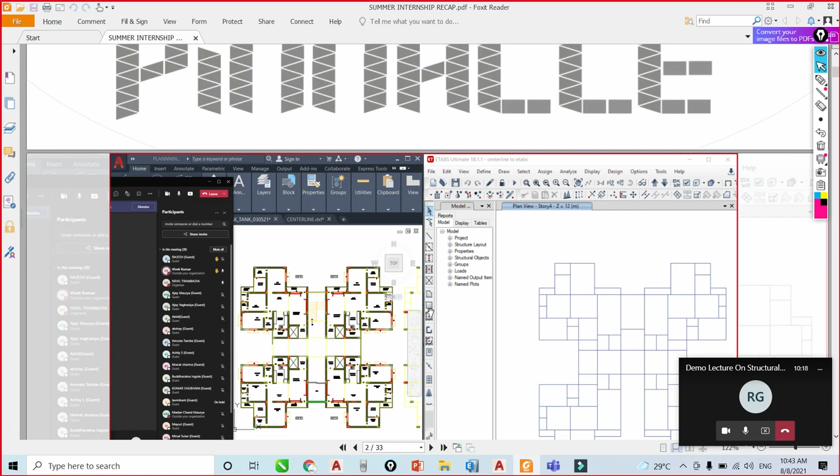So myself Nikunj Sondagar, and here you can see our summer internship program highlights. Here we did a step by step procedure to complete our 4 to 5 projects. On the first day we will discuss some basic overview of ETABS as well as AutoCAD drawing. Then on the second day we will try to understand the different grid systems using ETABS.

There are so many grid systems, and we have so many options to import the grid. We have architectural plan view, floor plan, radial distance, node to node distance. So we have many methods to import our drawing into ETABS software.

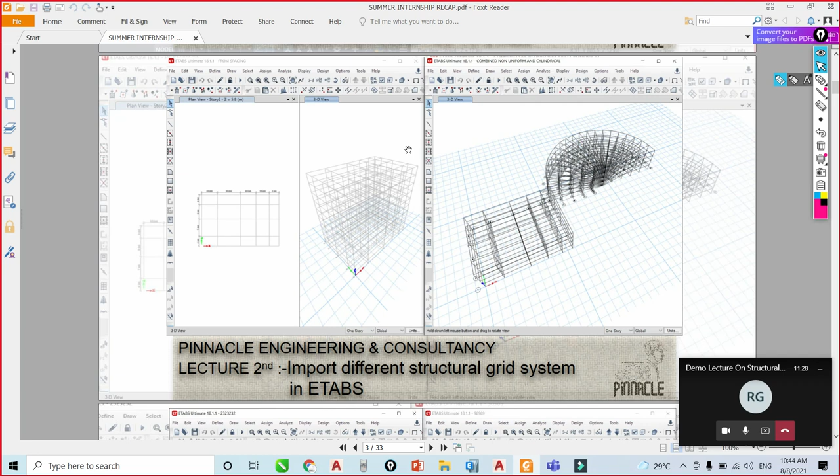We will discuss all these things. Then on the third and fourth day we will try to prepare a complete truss model as well as beam model, where we are going to compare the result output, manual result with software result.

So this is our input, and this is our output. We'll cross check this output with our manual calculation, and also discuss the shear force diagram and bending moment diagram.

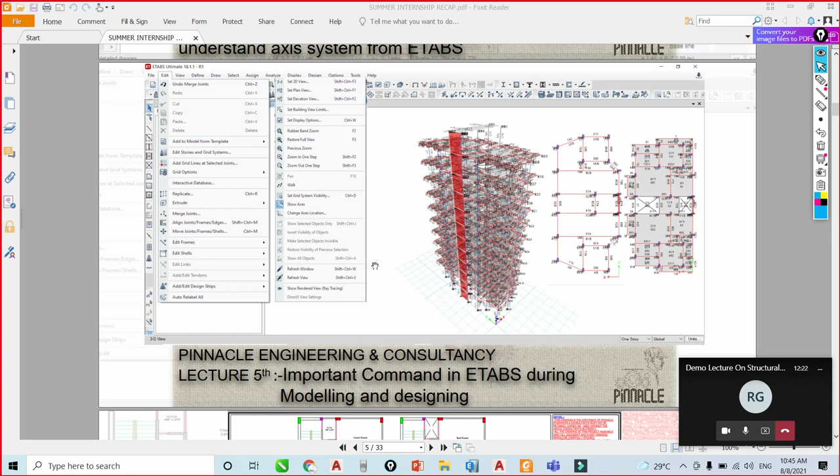Then next day we will discuss important commands used in ETABS during modeling, analysis, as well as designing.

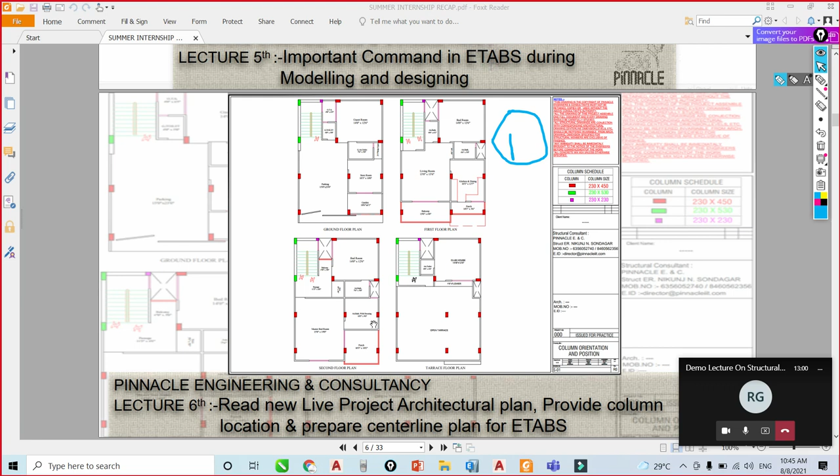Then our main task, our first live project, where we are going to deal with an actual real life project. Here you can see the architectural plan, and on the first day we need to provide column locations. So you can see here, we are going to provide a few columns, as per architectural requirement as well as structural requirement.

Then next day we will import the same project into ETABS. Here we are dealing with beams, and we are going to draw a beam layout also, so where the actual beam location is, and we are going to send this actual beam position to the architect to confirm the positioning of the beam.

Meanwhile we are going to import and prepare this model. After preparation of the model, we need to assign different loads.

First, here you can see the dead load, superimposed dead load due to the wall. So whatever wall you are going to provide here, we need to assign this load. Here you can see the UDL load acting on all the beams. How to calculate this weight per meter and all these things, we will discuss in the subsequent lecture.

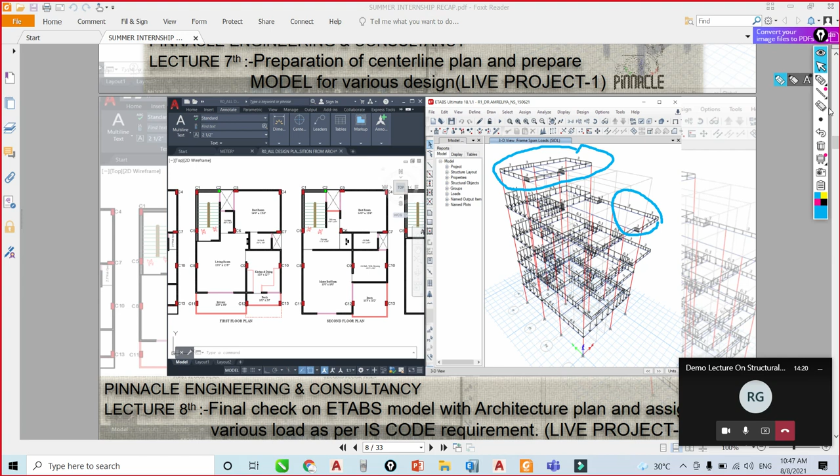Now, a very important detailed discussion about IS 875 part 1 and IS 875 part 2. Can anyone tell me what IS 875 part 1 is useful for, and what 875 part 2 is useful for? IS 875 part 1 is used for calculating dead loads, and part 2 is used for calculating live loads. Great, right.

So now we need to calculate this weight of the floor. If we are going to provide any RCC floor, this is the particular RCC floor, and exactly above the floor we need to place some tiles. So we need to assign this load also. We need to calculate all this dead load using our IS 875 part 1.

Now we will discuss the live load. Live load means human load and all other load which is movable. We are going to assign the minimum live load as per IS 875 part 2. We have so many different loads, and what is the minimum load combination? We will discuss minimum load in this subsequent lecture.

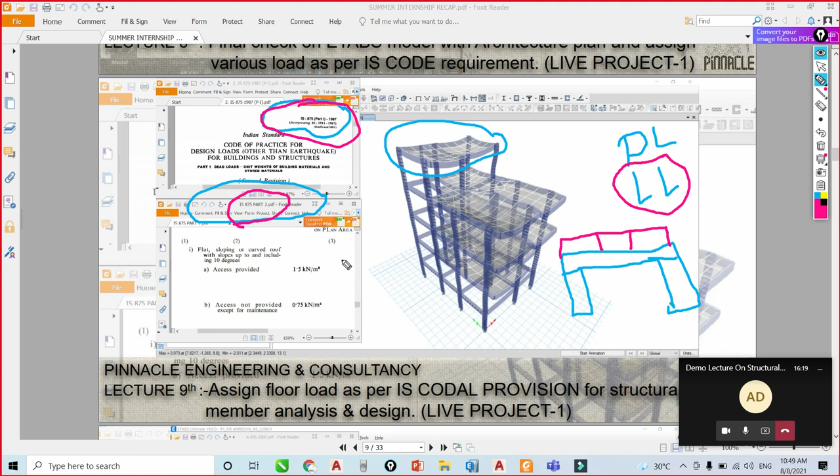Here you can see on my screen the load acting at a roof level. Like here we assign 1.5 kN per meter square live load at a roof level. But what is the actual roof? Is it an accessible roof?

Here you can see another case where access is not provided. At that point we are going to assign 0.75 kN per meter square. That means if you are going to provide any inclined roof or inclined floor, we need to assign only 0.75 kN per meter square load, because you are not able to stand or sit there. So this load acts on the roof due to live load, and this is very important.

And we have different loads for the sunk area, for the toilet, for the kitchen, for the balcony. We need to assign different loads as per structural requirement, as well as for the staircase. I would like to discuss that, just give me 5 to 10 minutes.

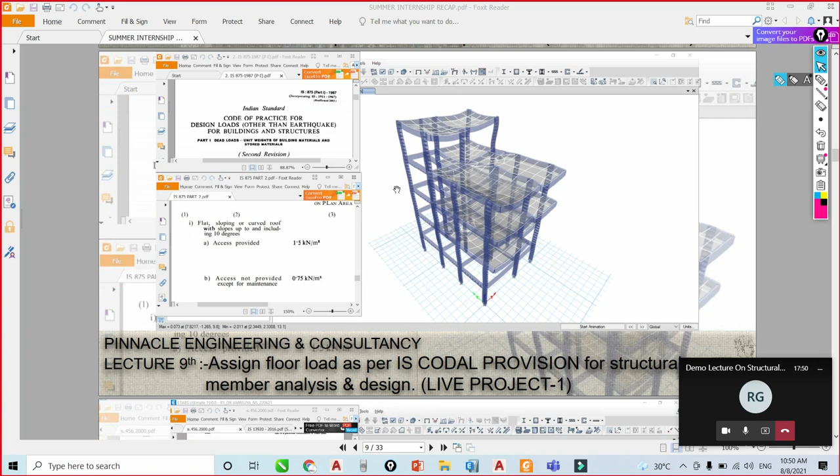Then next, assigning the dead load combination. This load combination is as per IS 456, useful for the design of foundation.

Excuse me sir, the presentation is not visible on my screen right now. Kindly leave the meeting and join once again. Okay, okay sir.

So this load combination is due to IS 456, which is useful for the design of footing. And in IS 1893 part 1 2016, the load combination is useful for the design of column, design of beam.

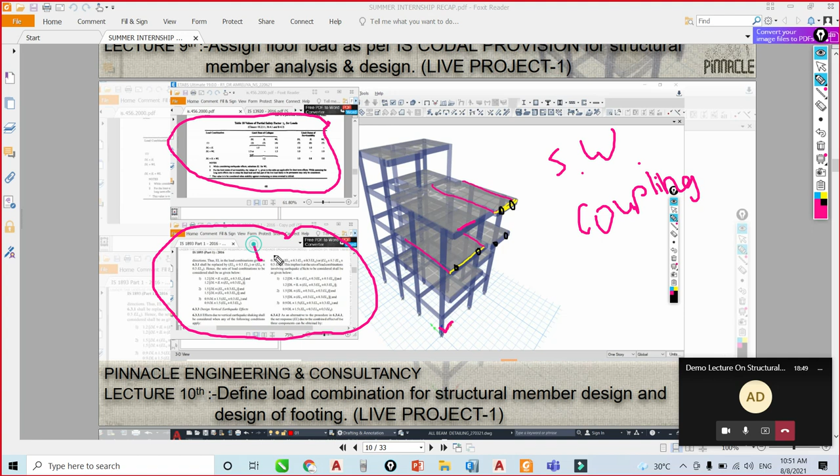Design of shear wall, design of coupling beam. So all the things will be designed using IS 1893 part 1 2016.

Then this is completed detailing, already done by our students. So here we are representing that. In subsequent lecture we will discuss these steps, how to deal with this detailing in our actual project. So here you can see the footing detailing.

And this is particular column layout position, reinforcement related to columns. Here you can see this plinth beam design. Then this is ground floor design.

Here we assign the torsional reinforcement. What are the importance of the torsional reinforcement, we will discuss in subsequent lecture. This is second floor layout, this is third floor layout, and this is terrace cabin layout.

So we are dealing with foundation to top of slab level, that means terrace cabin level. We are not going to ignore all the things, as per architectural requirement, as per structural requirement.

The presentation is not showing, so please leave the meeting and join again. I also tried it, but I'm not able to view your screen. Even I also tried, I can't see your screen. I'm facing voice lag. It's not visible because I'm also connected from my phone. No problem, I'm sharing the screen again.

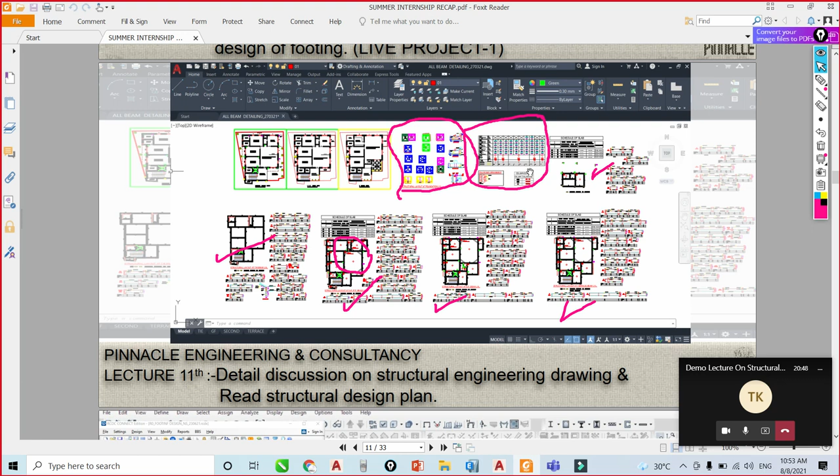Okay, so now you are visible, but the presentation is still not coming up on my screen. Now I'm able to see the presentation. Can you just take 2 slides back, because after load combinations it was completely blank out, we were not able to see. Turn off your video, sir, maybe it is possible due to that. And guys, those who are facing issues, you can turn the speaker from your device, change it to speaker so your voice will be clear. So now, is anyone facing the problem? No sir, it's perfect right now. Okay, start it.

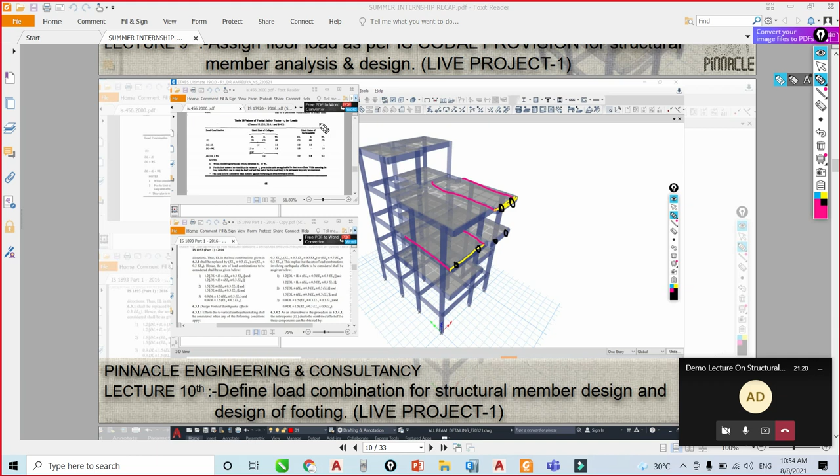So here we are discussing once again about the load combination. Here we are going to use IS 456 2000 for the definition of our load combination for the footing design.

Footing design done by using IS 456 different load combination, and our column, beam, shear wall, coupling beam, and all the things we are designing as per our IS 1893 part 1 2016. In subsequent lecture we will discuss this load combination in more detail.

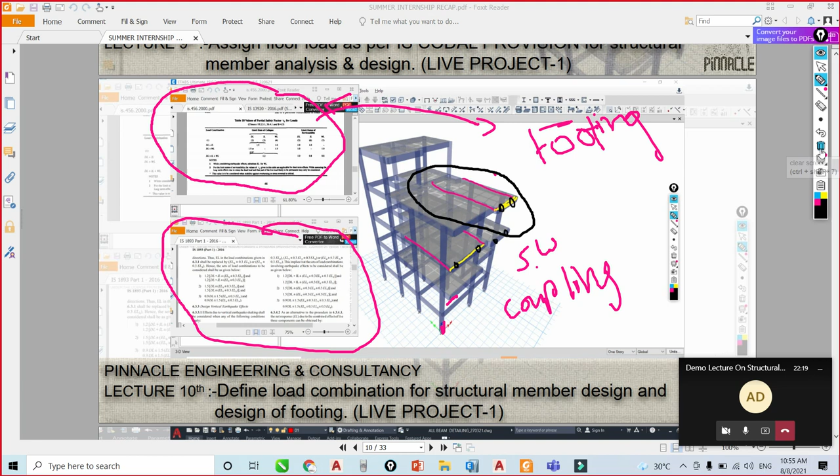So here you can see one more important term: this is release. At a secondary beam we need to release the moment for that particular beam. That means I will discuss these things, this is very important. This is our fixed beam, and this is our simply supported beam.

You already know that the fixed beam has a bending moment that looks like this, and simply supported beam bending moment looks like this.

To release the moment at a support, we are going to provide some releases. So at that time this feature is coming. We will discuss in depth, because this is a very large topic and we need to understand the actual drawing, so we will discuss in subsequent lecture.

So this is our particular structure design. Here you can see this is architectural plan, and then this is our footing design, footing layout, then column reinforcement detailing, and here you can see the plinth beam design, and this is our first floor slab layout, second floor slab layout, third floor slab layout and beam design, and this is our terrace floor layout.

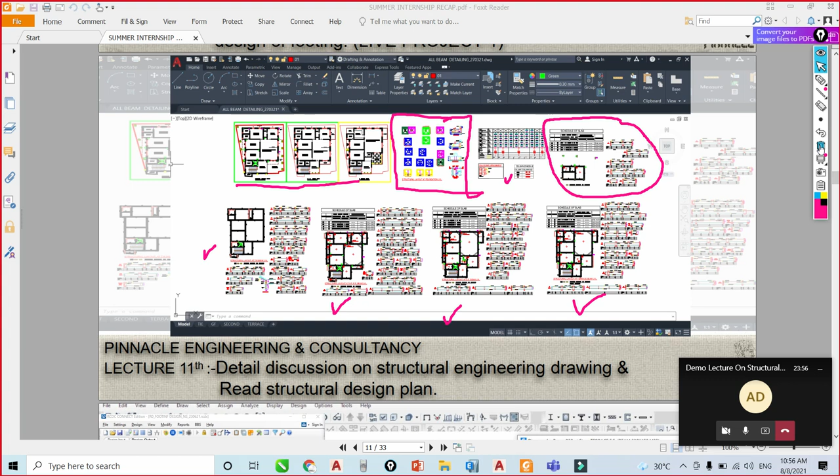So we are going to discuss all the things, that means we are considering from foundation to the top of structure. How to prepare this drawing and all the things we will discuss in subsequent lecture.

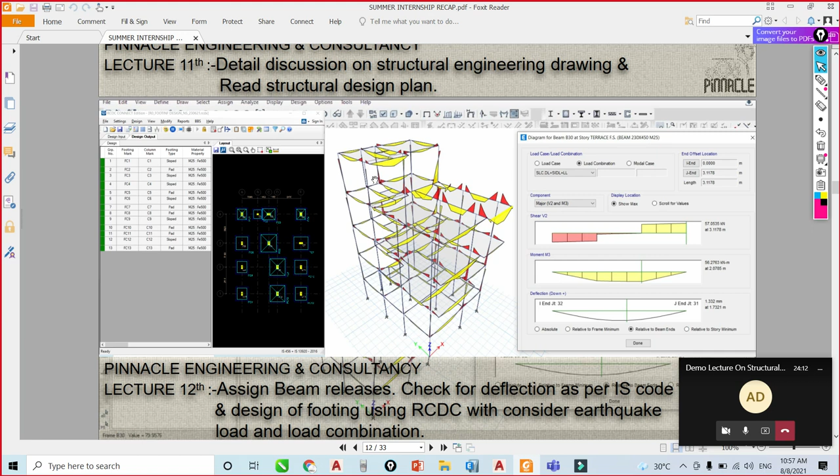Then in next day we will discuss about design output, and here we are going to use RCDC software to design our footing. And here you can see the beam reinforcement, beam bending moment check, shear force as well as bending moment.

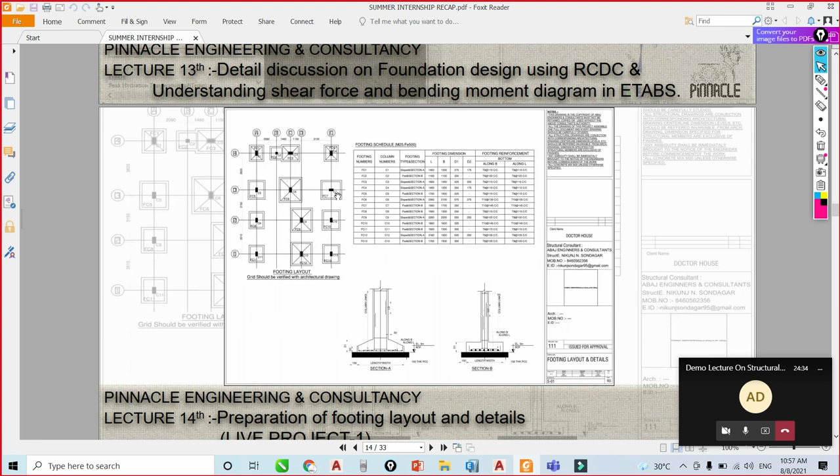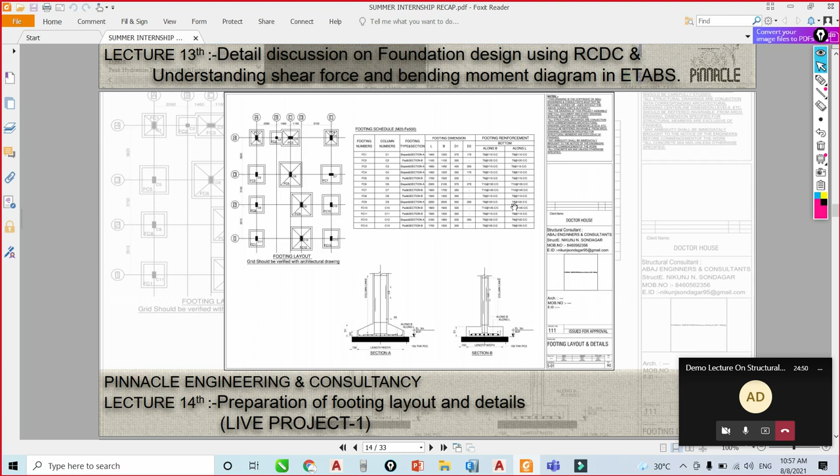One more detailed discussion about this, and in the final stage we are going to prepare our footing layout. As per architectural requirement, structural requirement, and site requirement, we prepare this sheet for site execution, and this drawing is already sent to the site for further work.

Here you can see some highlights related to the same project: the plinth beam layout, then the design of column using ETABS and RCDC, and preparation of the column layout.

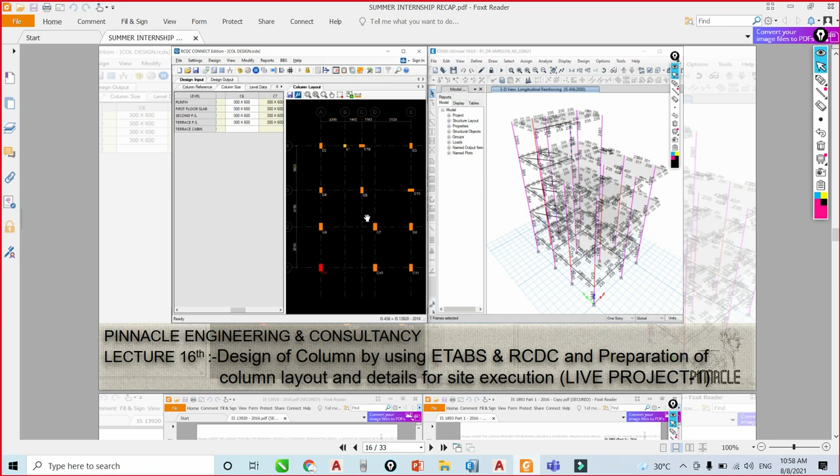Design of column using ETABS as well as RCDC.

Then a detailed discussion about IS 13920-2016 as well as IS 1893 Part 1 2016. In more depth we discuss SP34 and IS 16700. IS 16700 is particularly useful for higher structures, so we will discuss IS 16700 and SP34. SP34 is basically useful for detailing purposes.

Now this is our project number 2. Same introduction.

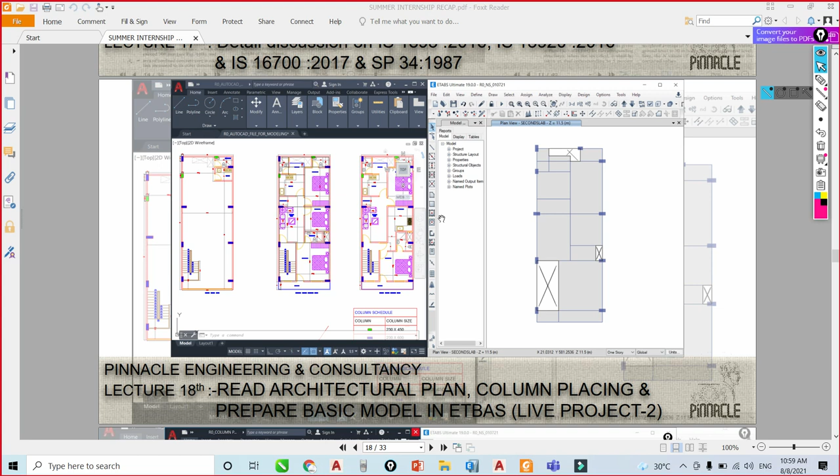Can you please share this presentation in the WhatsApp group? Definitely, we will share the presentation with you. Due to network issues, the presentation screen is coming blurry from our side, so we can't read some parts of it. No problem, definitely we will share the presentation with you. Okay, thank you so much.

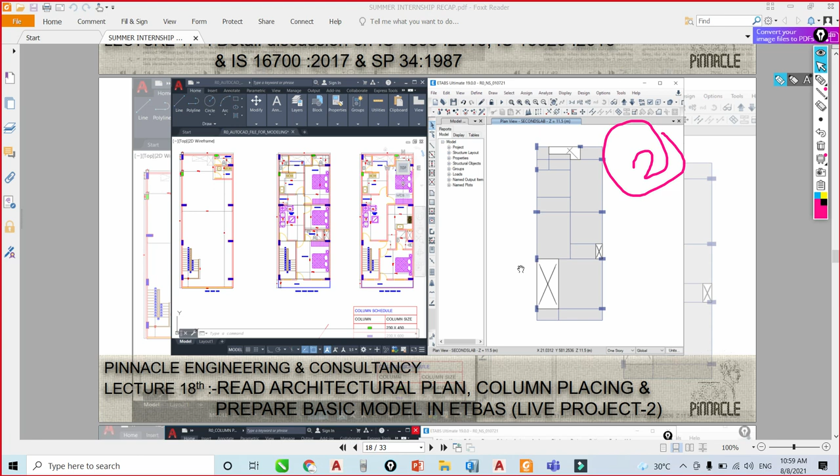So this is project number 2. Here we are going to deal with column positioning first, then preparation of the model, and the final model with all load combinations.

Here we are going to assign the stair beam, as you can see. We are going to detail it like this and we are not going to ignore this beam, because as per structural requirement we need to provide each and everything. So in depth we will discuss staircase design and the different methods to assign the staircase load.

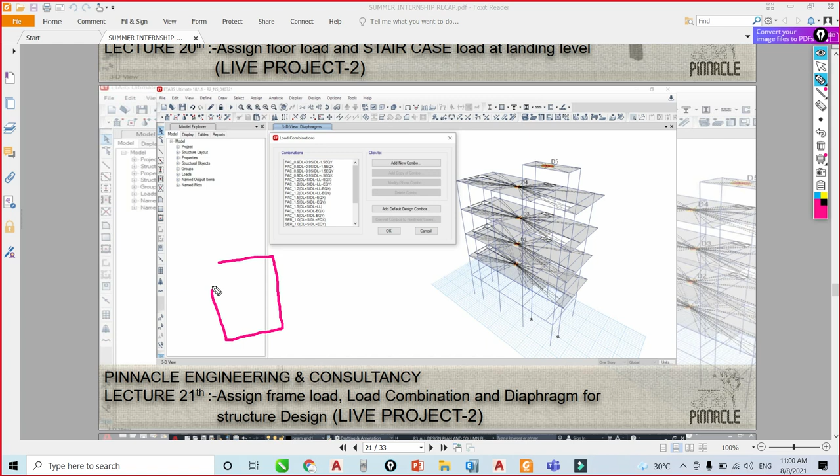Next, here we are going to assign the diaphragm. Diaphragm means, let me give you a simple example: this is the plan view of our bed, and this is the plan view of our dining table.

Now I am going to assign some inclined load, same for the bed and same for the dining table. So can anyone tell me, due to the bed and due to the dining table, which gets more effect - the bed or the dining table?

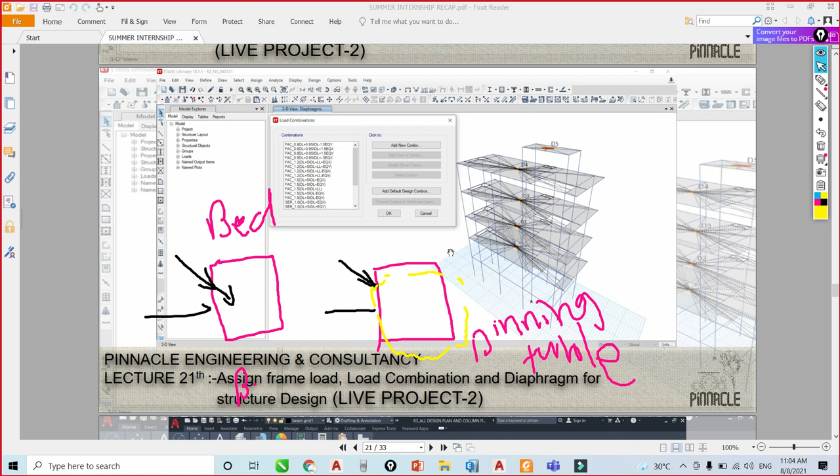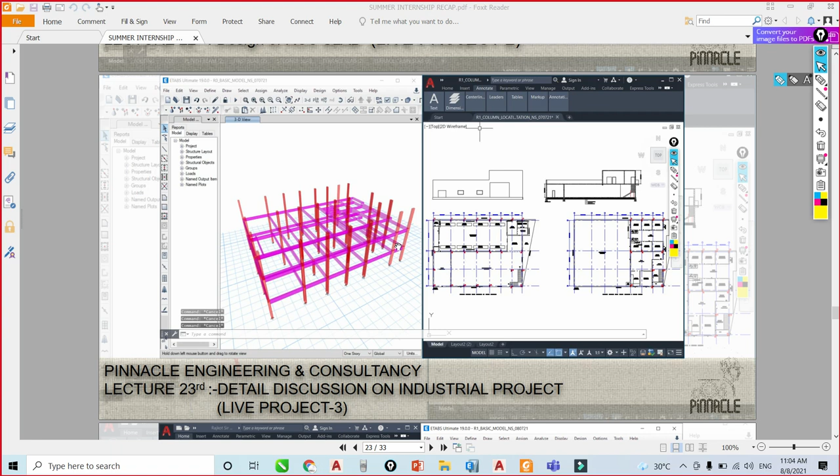Yes sir. Okay, then let us design the same RCC slab for plinth beam, first floor, second floor, third floor, terrace. Then project number 3, detailed discussion on industrial project. Same model preparation. Then project number 4, a particular commercial soft building. Here you can see we are going to deal with soft storey detailing, right?

Okay, then here we are going to design our eccentric footing. Here we have some eccentric footing, so we are going to deal with this thing also.

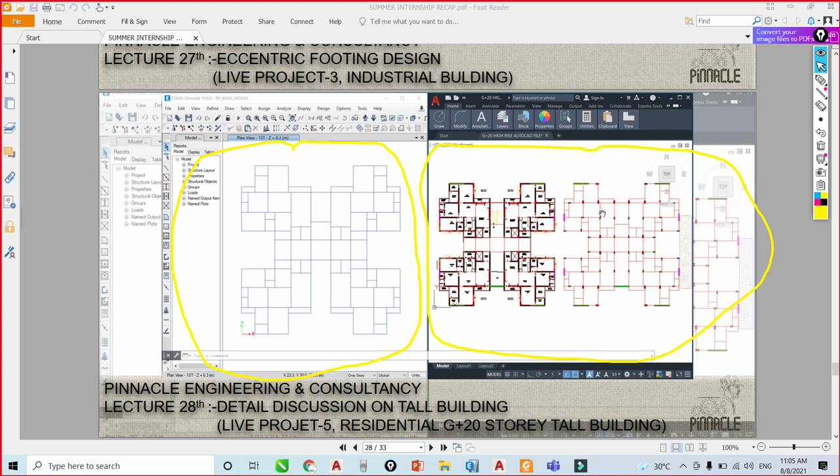Then this is our particular high-rise G plus 20 storey structure. On my left hand you can see our ETABS model, and on my right hand you can see our AutoCAD file. So here you can see the particular model.

मैं आपको genuinely एक बात बता रहा हूँ, इसका जो प्लिंथ बीम था और फर्स्ट फ्लोर का स्लैब था, उसका मैंने सिर्फ मॉडलिंग किया है। बाकी सारी चीज़ें जो मॉडल प्रिपरेशन से related हैं, वो हमारे student करेंगे। इसका जो भी मॉडल प्रिपरेशन था, वो सब हमारे students ने किया है।

मोस्टली हम 2 प्रोजेक्ट करवाते हैं, यानी आपको हम task assign करते हैं। जो students ने ये सब task किए हैं, model preparation will be done by student.

Finalize ETABS model as per our IS 16700, live project 5, G plus 20 storey tall building. Here we are going to assign different loads, and all the loads assigned by our student.

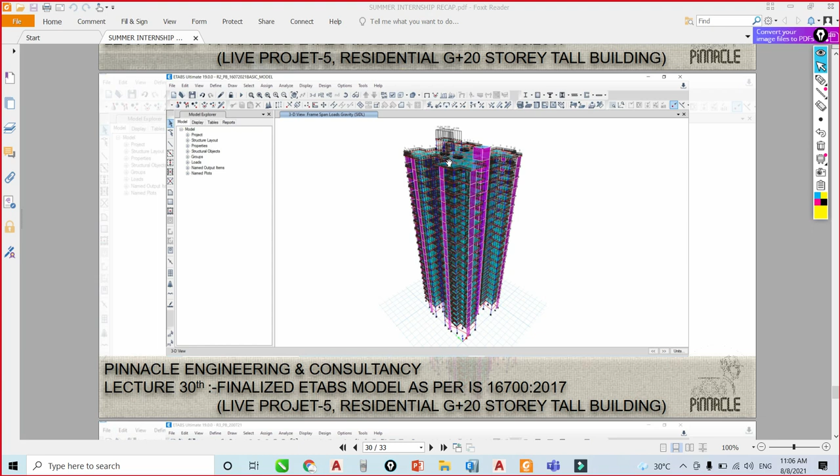Now our main task, which is done by myself, related to definition. So here you can see the definition related to earthquake force, wind load, and response spectrum.

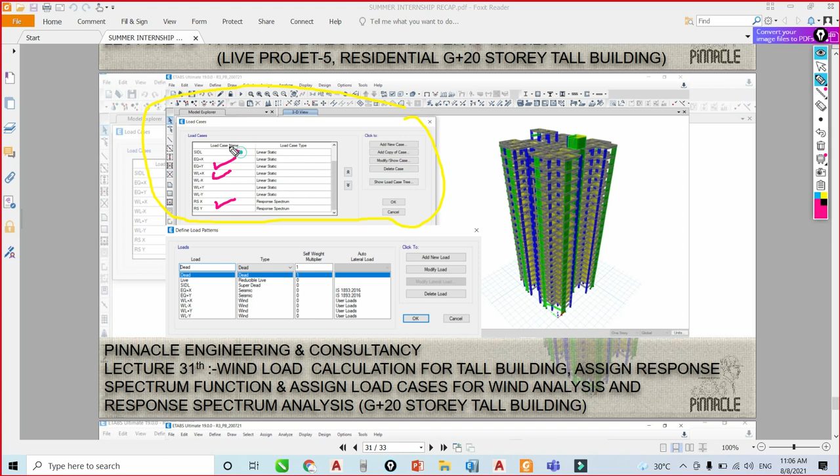So here we deal with the response spectrum, wind load also. You can see the different load cases, and this is our particular load pattern: dead load, live load, earthquake force, wind load.

Okay, so we are going to... Excuse me sir. Hello. Sir, what is the difference between the earthquake load and response spectrum?

Response spectrum is just another method to analyze the earthquake load on a structure, right? I think. In response spectrum... so why do we have to put, I will tell you both. Earthquake load on - okay. Response spectrum, it is depending on time.

Response spectrum is depending on time, and for our normal earthquake, which is not depending on time, as per time we are going to check the behavior of structure by using the response spectrum method. With respect to time, we are going to check the behavior of structure. You can see here - see the behavior of structure.

In different modes, we need to check the torsion of this building. This is not visible in a normal earthquake force. This is a multi-degree freedom system, right? And if you are going to design with normal structure, that means normal earthquake force, this is equivalent static analysis and single degree of freedom system. Here we are going to consider multiple degree freedom system.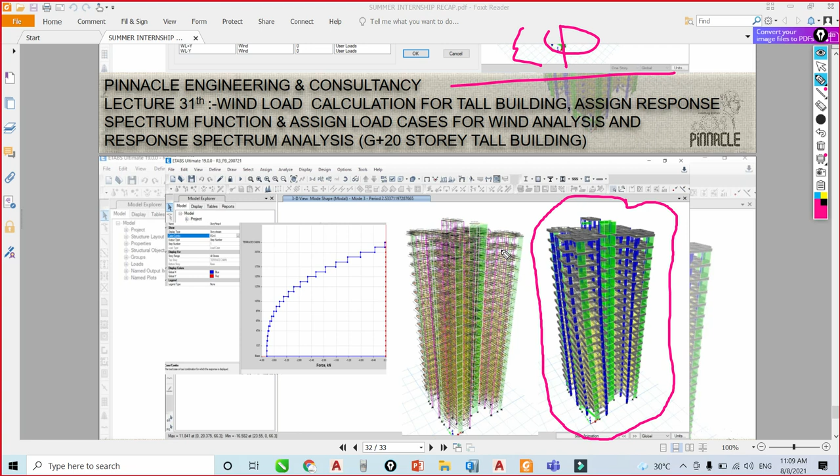I am going to show you all the models, right, just for 5 minutes. Sir, someone is asking in the chat, please reply them. Okay, just 5 to 10 minutes wait karo, answer karte hain theek hai, step by step. And who says this, are you faculty from Pinnacle? So guys, don't say that. कुछ भी बोल रहे लोग, वो कोई faculty नहीं है। अभी answer कर देंगे, आपका doubt थोड़ी देर में हो जाएगा। सब लोग एक काम करेंगे, last में 10 minute doubt का रखेंगे। जो भी sir doubt है, पहले complete कर दो। आपका जो भी doubt है मैसेज में टाइप कर दो, सारे doubt ले लेंगे last में 10 minute। Please type your doubt in the chat box, like we will take all the doubts in the last 10 minutes.

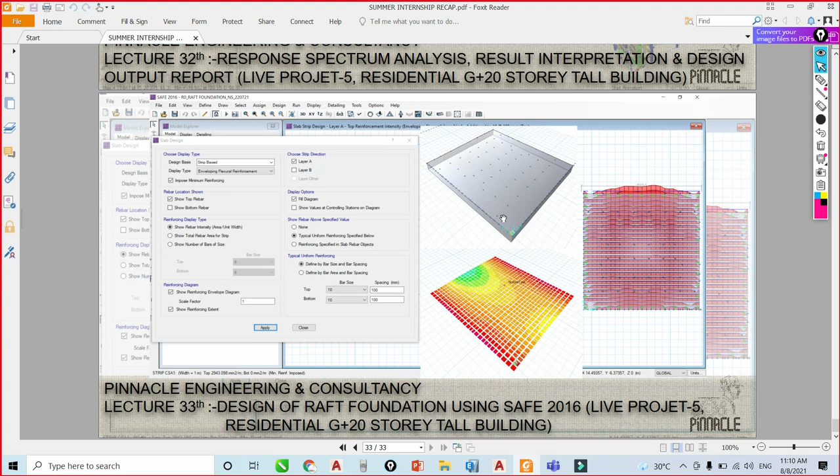Yes Nikunj sir, continue. So in the next step we are going to design the raft foundation. Here you can see the design of raft foundation, here we are going to deal with live project 5. यहाँ पे उसका हमने raft foundation की designing की है। So in depth we will discuss about raft foundation also.

So this is all about our presentation, and right now I am going to show you the same project.

Okay, so this is our project number 1. And this is our architectural plan of this same project.

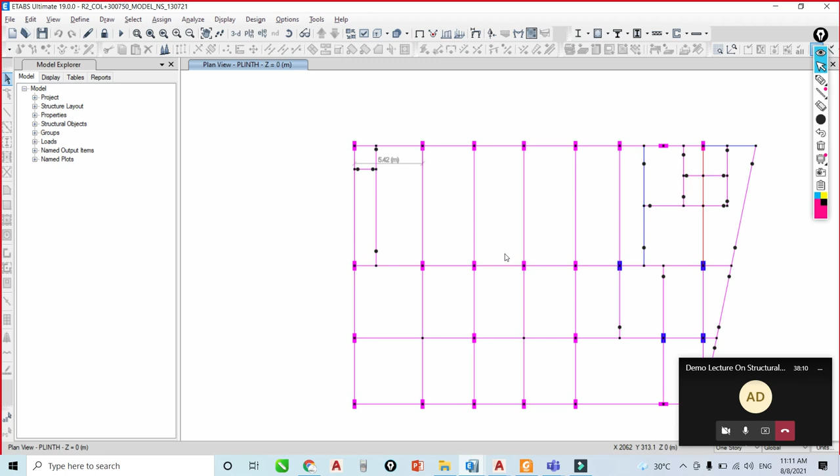So you need the plinth level. Now you can see here the particular plinth beam, so we are going to assign the different columns, and then later we are going to draw our plinth beam.

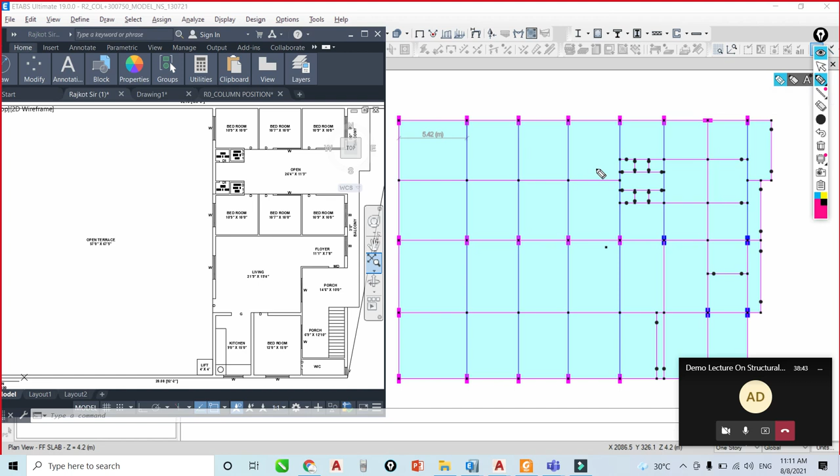And then this is our first slab level. That means in the half portion we have an open terrace. It means here we have terrace, and half the area will be useful for our residential purpose, as per our architectural plan. Then at the terrace cabin level, right, this is our last level.

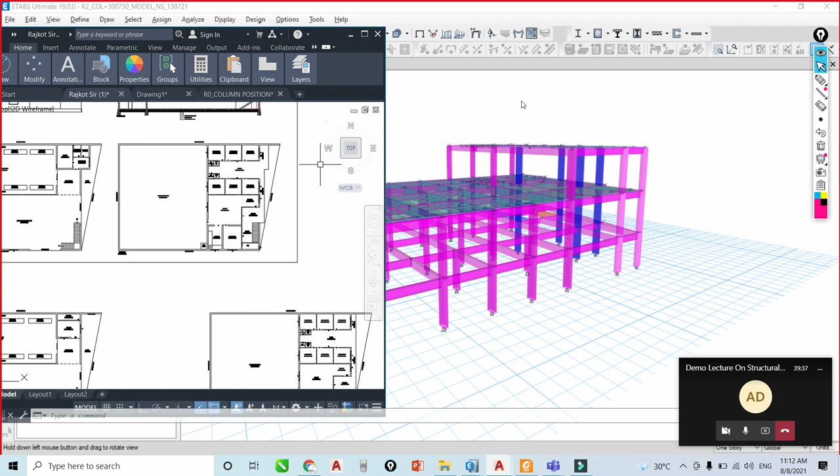Now you can see the 3D view, more realistic view, the particular 3D view. So by using ETABS software, we are going to prepare and transfer our AutoCAD plan into our ETABS model and design all the subsequent structures.

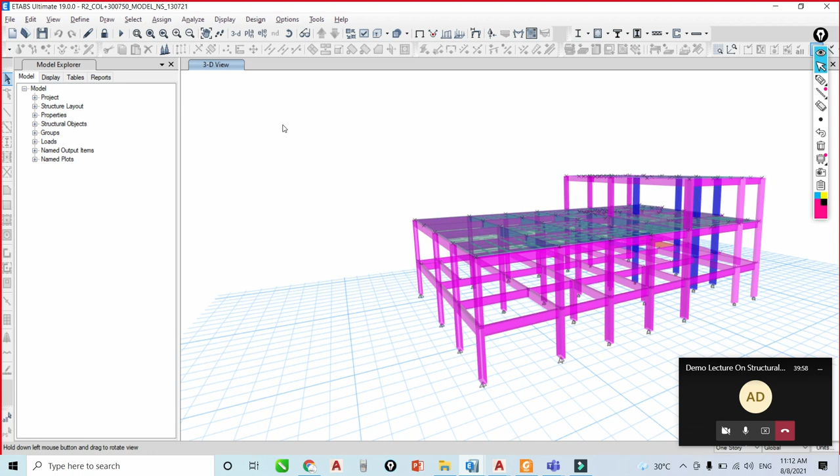In more depth, we are not going to show you our actual detailing, due to some privacy. If you join the session, then we will show you all the things, and we will discuss and share all the details within your personal work, in your personal use. So this is our project number 1.

And then this is our project number 2. So this is kind of like a shop as well as restaurant. In the ground floor we have some shops, and at the first floor we are going to provide a restaurant. So you can see the same.

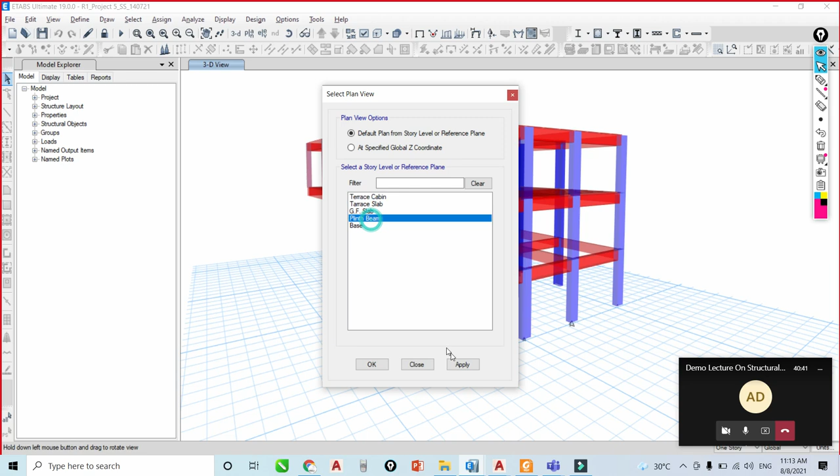So you can see here this particular project number 2, same open plan level, so we are going to provide more plinth, because this is a requirement, and how to deal with the plinth beam level and all the things we will discuss in a subsequent lecture.

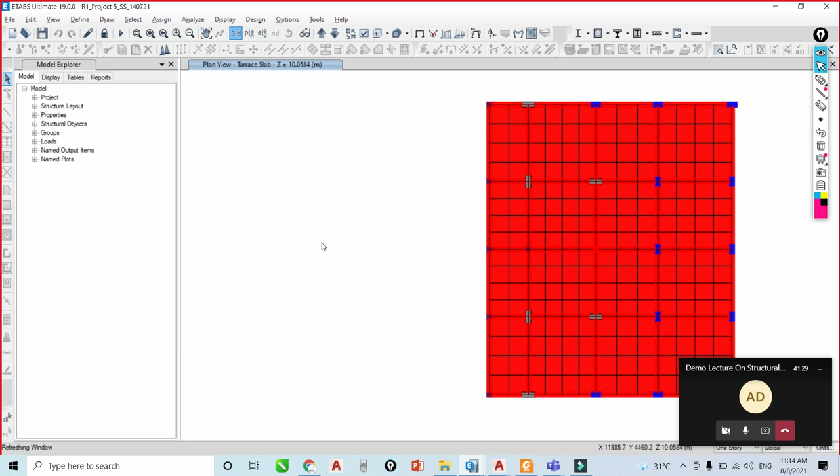And this is our particular terrace slab level, where we have some openings over here, you can see here OTS. Then this particular terrace cabin, here we are going to provide the complete step. And this particular terrace cabin.

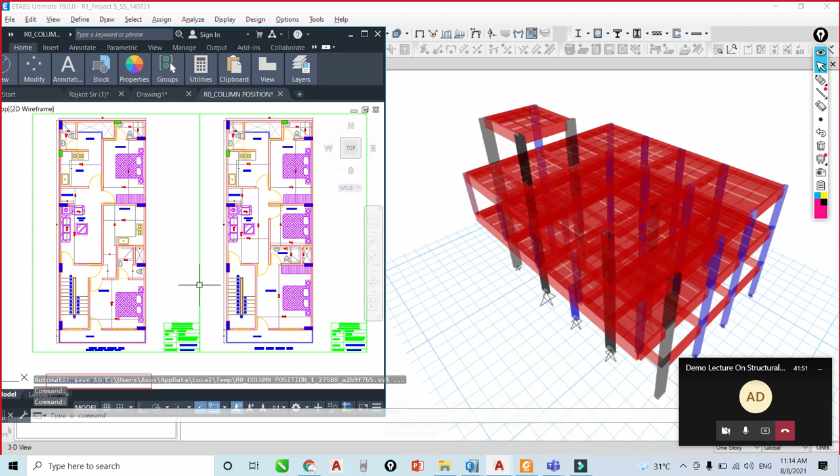So we are going to detail in depth, so you will learn all the things related to structural drawing. Then this another project, we will discuss within 5 minutes related to this project. I would like to show you this high-rise structure.

See, actually, the high-rise structure has the detail, right? Here you can see the reinforcement requirement. I will show you the particular one.

Sorry sir, I'm disturbing you, can you just once again share your screen, because it's completely blank on my side, I'm not able to see your presentation. Okay, just one second, I will share my screen. Everyone facing the same issue? No sir, we don't have any issue. Okay, so kindly close the meeting and join once again.

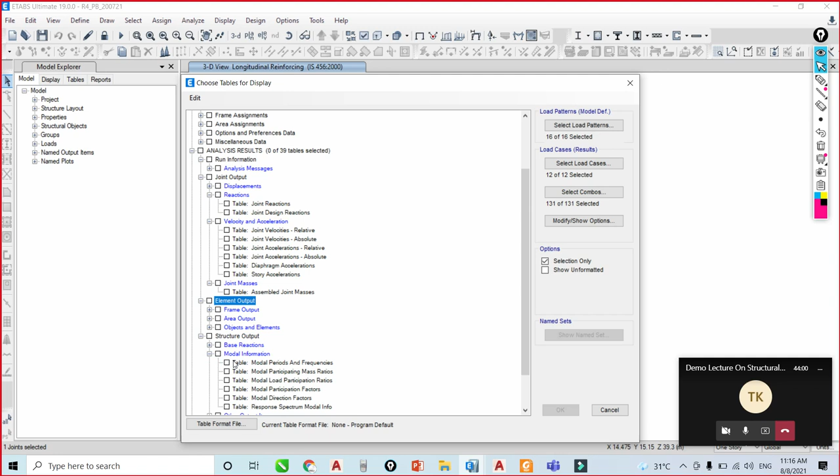Here you get modal participating mass ratio. We are going to detail, that means understand this feature.

Just one second, it will overload. Okay, so here we get one table, the table is modal. Wait, is everyone able to see the screen? No one has a problem? No sir, I am able to view the screen. Okay, let's start.

Here you can see the modal, and here you can see the modes. Here you can see mode, mode, and this is our mode cases. So what is the meaning of modal and modes? I will give you some basic example.

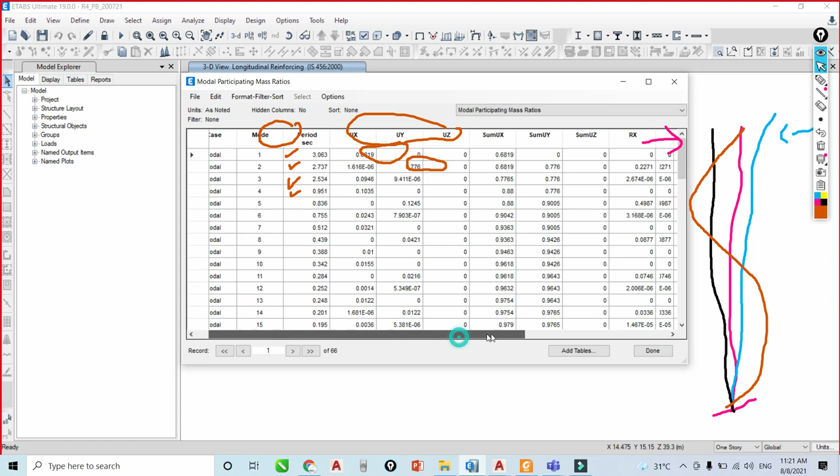This is the torsional mode. Torsion in X, torsion in Y, torsion in Z. Very most important, your mode 1 and mode 2 are torsion free.

See, everyone does the response spectrum using auto, using YouTube. But the very most important thing is to control this RZ. Here you can see only 10% mass. When you learn from YouTube, you never get this result and you never understand how to deal with this thing. So we need to reduce RZ to less than 20%. That means less than 20%.

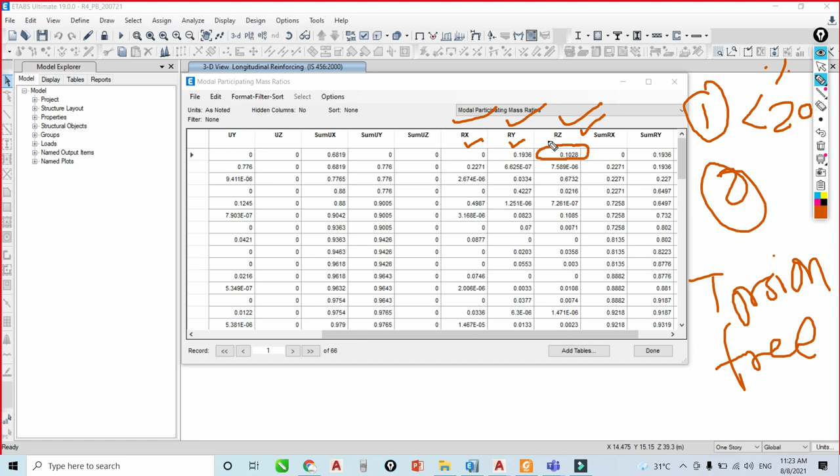Okay, so we are going to deal with this. Okay, so what is the meaning of RZ? We'll discuss — RZ means your mode 3. You can see here this structure. This is the torsional mode, but this is mode number 3. You can see here mode 3, it is visible in mode 3.

If it is not visible, sir — actually my screen has gotten stuck on the modal participating mass ratios only, so I can't really see what you're explaining, is the screen visible now? It's connected from my phone. The screen is visible but it's freezed at a certain point, taking a lot of time, maybe due to network issues on my part. Now you can see here mode 3 — is mode 3 visible to anyone? Yes sir, it's visible here. Those who can't see, zoom in and look at the screen, connect through mobile and zoom in.

So mode 3 — okay, you can see here now mode 3 having 67%, 63% mass, right? So we need to allow the torsion in mode 3. So we have to set this structural system to look like this. For this purpose we need to assign different shear walls, different coupling beams, different columns, different column positioning. So we need to do all these things. Okay, we'll discuss all of this in our subsequent lecture.

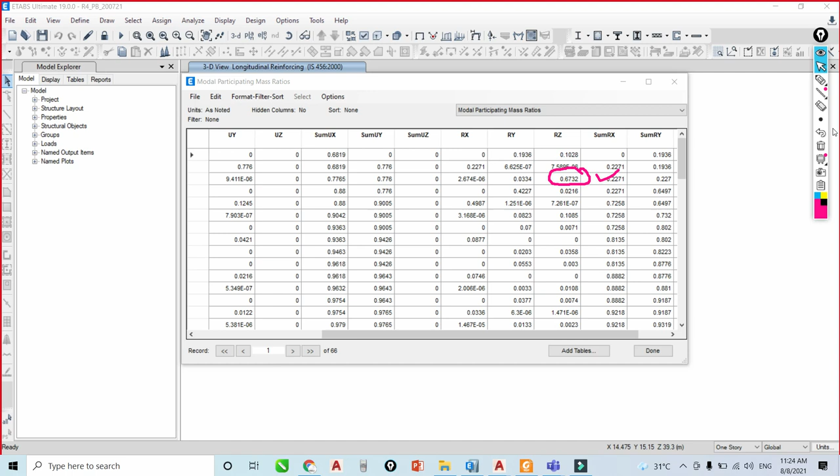Okay, now I will take five more minutes, and I would like to show you my last presentation about eccentric footing with strap beam. Okay, so apart from ETABS, we will discuss and give you a detailed discussion about SAFE.

Okay, so now if you click here, I will show you the architectural convention. See here, all the footings are eccentric footings at the periphery of the structure. So what we can do here is provide a horizontal beam at the footing level.

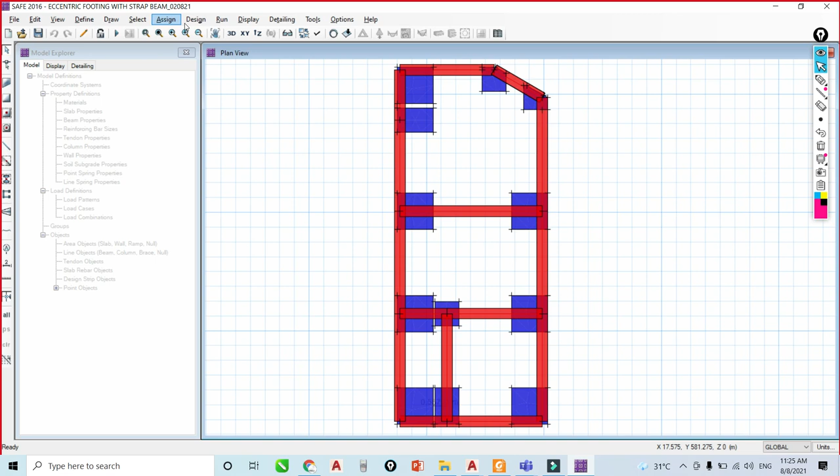So here we are going to deal with this structure also, how to import this file from ETABS to SAFE and prepare this particular layout, and here we are going to design the structure. So you can see here the displacement of this particular structure. In my bottom screen you can see the maximum and minimum displacement.

Okay, now if you click here.

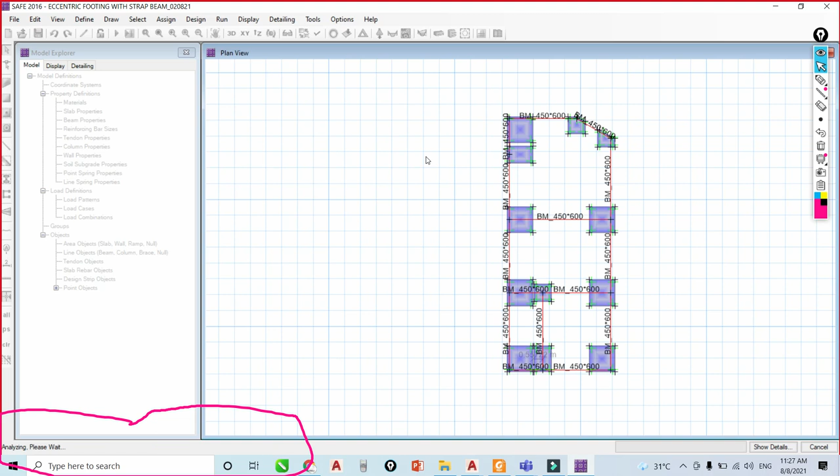Okay, so in depth we will discuss all the things, how to prepare this.

So you can see here the required reinforcement. So this is 2 to 3, and all the places have different reinforcement requirements. So we'll discuss how to deal with this reinforcement and how to prepare the AutoCAD drawing.

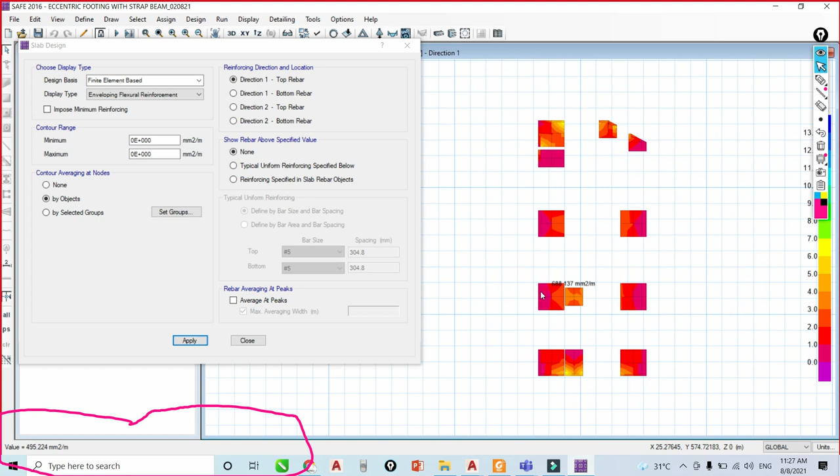You can see the beam detailing also. Here you can see the reinforcement requirements for this particular beam. So we are going to discuss all the things related to this topic.

Darpana sir, hello. Yes sir, okay sir, from my side everything is covered. Someone was asking in the chat box, sir, please reply over there. Okay, okay, he was asking something.

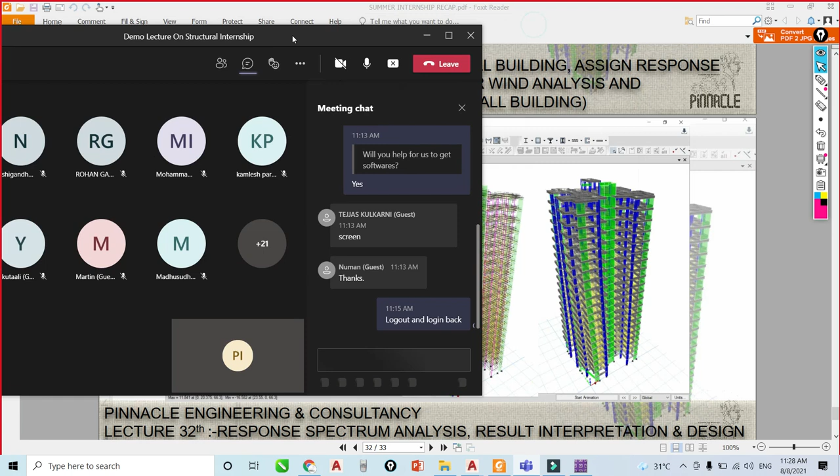Madhusudan was asking whether you are going to teach the design of components using ETABS or AutoCAD. It will be ETABS, right sir? ETABS, definitely, we are going to use ETABS. Components will be designed in ETABS itself, and the detailing will be done by AutoCAD.

So guys, if you still have doubts, you can ask us. Hi sir, yes, good morning. I have one doubt, this is Madhusudan speaking. Yes Madhu. As I asked, are you going to teach the detailing of components using AutoCAD or ETABS, sir? By using ETABS results, percentage of steel or area of reinforcement, will the design of components be done by AutoCAD or what, sir?

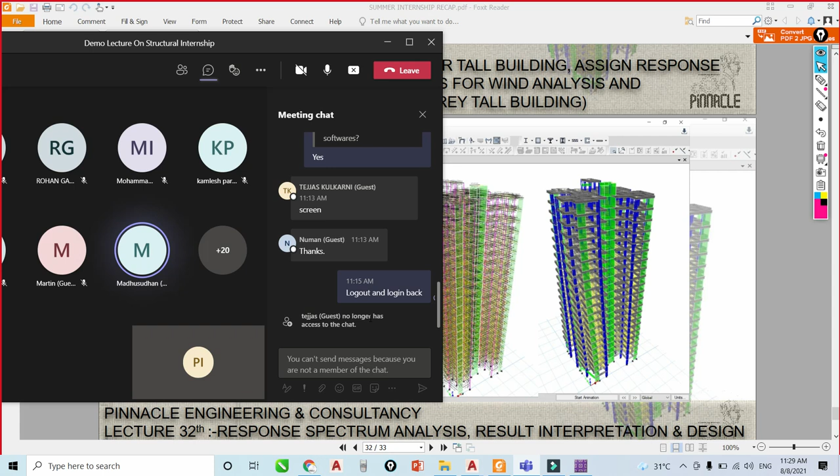First we will check the reinforcement from ETABS, and then calculate the number of reinforcement requirements by using AutoCAD. That's why I'm asking, are you going to teach by AutoCAD or by ETABS only, sir? AutoCAD, definitely AutoCAD. So by using ETABS results, you are going to teach components of design in AutoCAD, right? Right, yes sir, thank you sir.

Sir, excuse me, one more thing, what about RCDC software and other things like Excel sheets and everything? Yes, about those, everything is included, but due to some time limitation, we are not going to cover all the things in very much detail.

RCDC, but sir, as of now will we be using it in the few projects? Are we going to use those? Yes, we are going to use it, and you can see in the particular screen. Just one second, I will show you the ETABS, sorry, RCDC. Yes, this is RCDC.

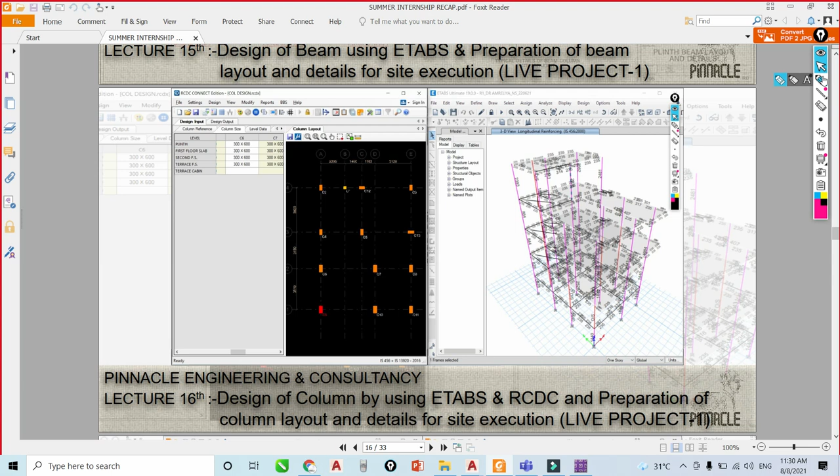Here we are going to design this column using RCDC. And you can see here the foundation design. Footing design done by using RCDC. And then detailing will also be done by using RCDC.

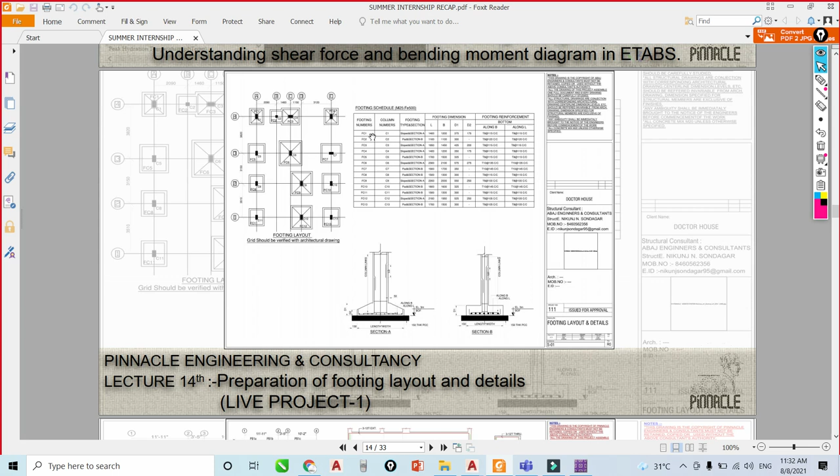Still, if you have doubt, you can ask. Sir, what topics will be covered in foundation design? Like combined footing, eccentric footing, raft foundation - all these things we are going to cover in depth.

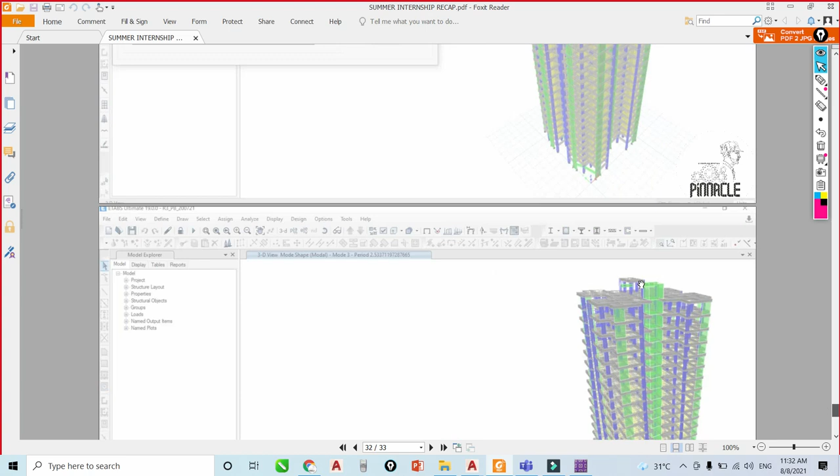So we are going to do this in SAFE or by manual? SAFE, definitely SAFE. And sir, after finishing up all the software, we'll also learn the manual calculations, right? Yes, definitely, that is very much required.

Is there any doubt? And guys, we will take up the files. First one will be the residential bungalow. We'll start from the basic residential bungalow, then low rise, then high rise, and then one industrial building is also there. The fifth one is your project, so you will work on 5 live projects. It will cover A to Z of your designing purpose. You can easily design low-rise or high-rise buildings after completion of the internship.

Yes, someone was asking - go ahead. Sir, the time is from 9 a.m. to 10:30, and if required, sometimes we'll stretch up to 11.

So it is a live session, no sir? Daily live session, daily. And the same live session will be uploaded on our platform, and we will provide you the links. Daily it will be uploaded within 1 or 2 hours. What if you are attending the recorded session and in between you get stuck - we will add you in the WhatsApp group where your other friends are also there, and Nikunj sir will also be there.

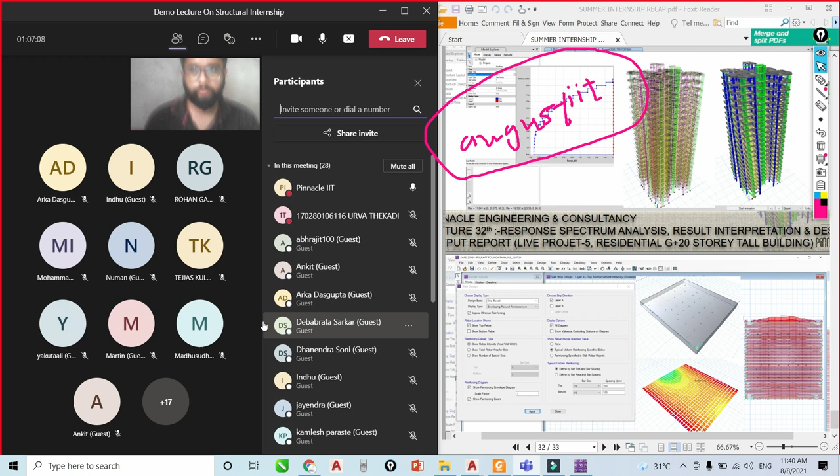Today there is a lecture for 3 hours, in the evening. For those who are joining today, we have arranged this 3-hour lecture. From next Sunday there will be a holiday, but today there is a lecture.

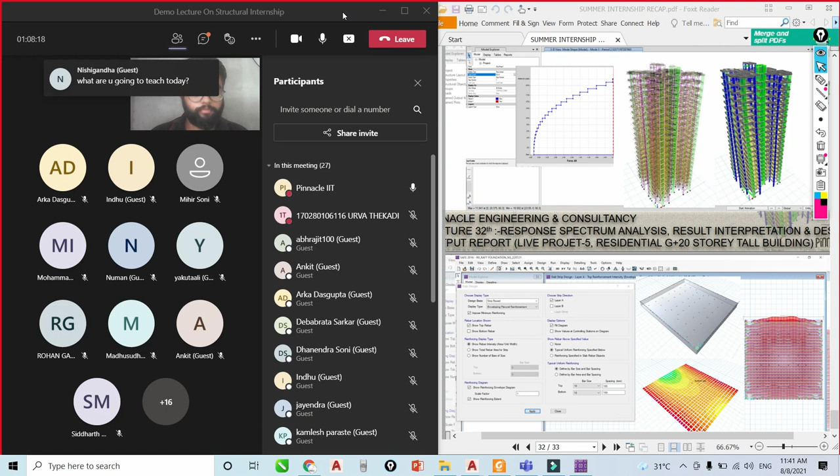For those who don't have much knowledge about structures - for those we will have extra classes. What are you going to teach today? Nikunj sir, what will you teach today?

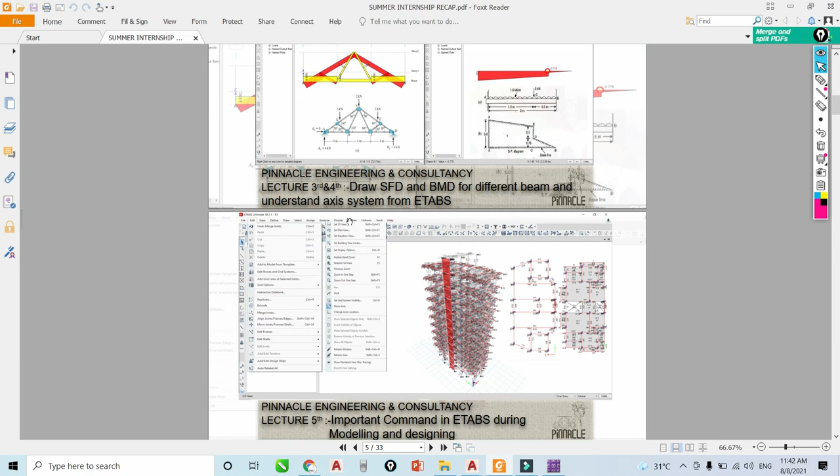We will discuss the basic overview of ETABS, then preparation of different grid systems, and then preparation of particular beam and truss models. Then a detailed discussion about ETABS software, and finally we will discuss our live project - preparation of column positioning.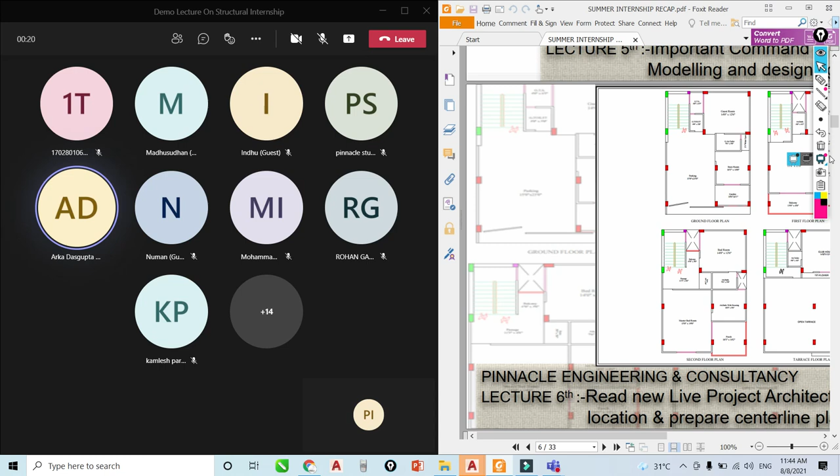Thank you. So the August class will start from tomorrow, right? From tomorrow 9 p.m., or from today onwards 9 p.m.? Daily class timing will be 9 p.m.

Today we will take the brief of the session, which will be around 3 to 4 hours. Today it will start from 6 p.m.

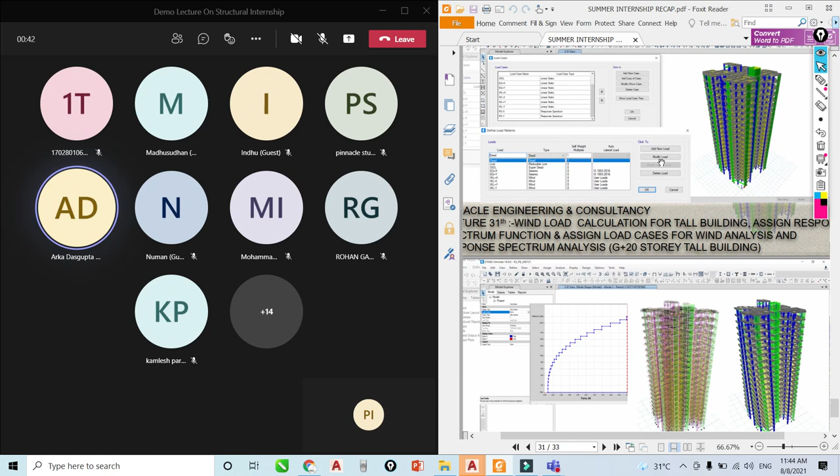Sir, today I'll not be available. So will a lot of things be discussed today? No, as today is the first session, it will be like an orientation program, where we'll give a brief detail about every software and then give all the links from where to download, including the installation guide.

The installation guide will be posted in the WhatsApp group only, so you can join the WhatsApp group where we'll provide the videos. We have already created the videos and uploaded them on our YouTube channel, so we'll provide the links there, and you can get them since I won't be available tonight. From tomorrow onwards I can do the normal classes, because everything is going to begin from tomorrow onwards only.

Yes, but you need to also watch the recorded session. Okay, I will watch it, but I can't attend the live one today. Oh no worries, if you are not attending the live it is not a matter, but you need to watch the same because each and everything depend on each other. So never miss it.

Yes sir, so I'll get the recording structure there in the WhatsApp group. In the structure there is a major thing - if we ignore one lecture, we won't be able to cope up. So don't miss any lecture. If you somehow miss it, you can watch the session before the next lecture. Yes sir, I plan on doing that.

Sir, I just need to ask one thing for tall structures - are we going to consider the gust factor and everything? Because for tall structures, most consultancies calculate the data manually and then apply it. So do we have to calculate that manually, that concept?

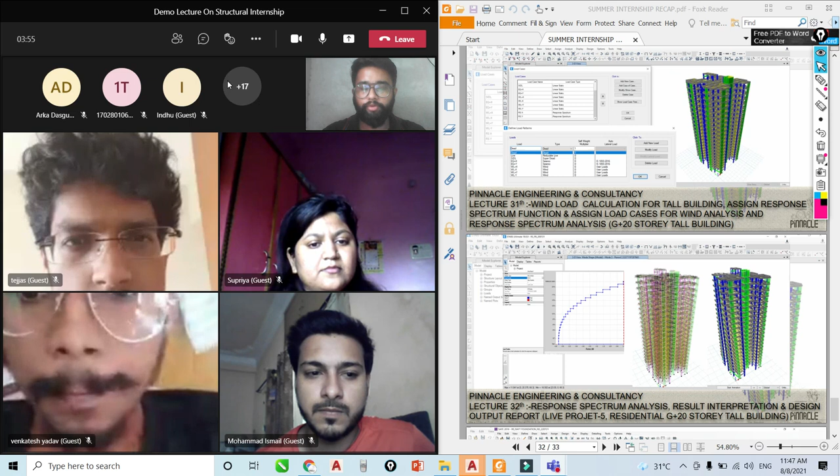When does the next batch start? We have not planned for the next batch yet, buddy. Maybe it is possible we start in December.